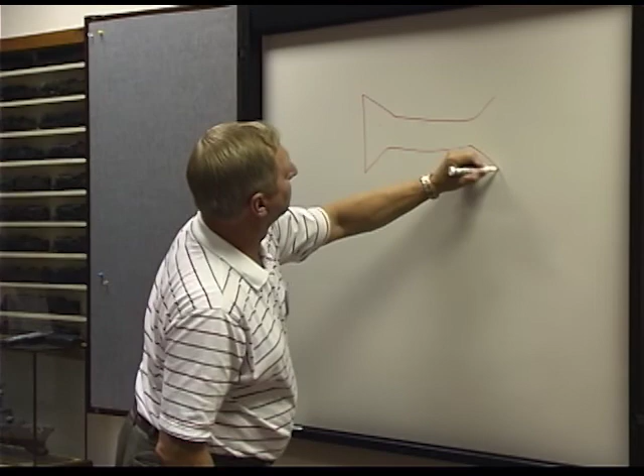What we did in 1992, for about $4 million, we installed slab shape rolling, which follows on Rod's comments about yield. When we were rolling a slab, on the last pass we would make that slab a bow tie shape. And I'm drawing in 3D, so that when we rolled it, this would end up with a little bit of a tongue on it. The natural tendency, if you didn't have this extra edge on it, was for it to be round. So the combination of these two shapes ended up with something almost perfect for using the maximum length on the plate. That was called slab shape rolling.

That uses a very high pressure hydraulic system, and there's probably 3 of those installed in the world, and one of those is at Conshohocken on the roughing mill. It improved our yield about 3% when we installed that in 1992. So that was one of the technical improvements that we had.

Thanks, Jim. Get this back down. Then, and I'm going up in history, and of course I'm going to be around a while, and there's a lot of people that know this story, so I don't have to, for the camera's sake, extend this too much longer.

1991, I'm in the 110-inch mill, up in the pulpit, where I always stayed, and I see down at the end of the run Bob Shaw. I said to the operator - Shaw at that point in time may have been president of the company, I'm not sure. Anybody know? Sure, '91, not quite yet. Shaw was not at Conshohocken, but he was up here in some capacity. He was down there, and I saw him at the end of the run with a tape measure. I said, who is that? Who's got a tape measure out on my run in the way? They said, oh, it's Bob Shaw, I think. And I said, yeah, it is Bob.

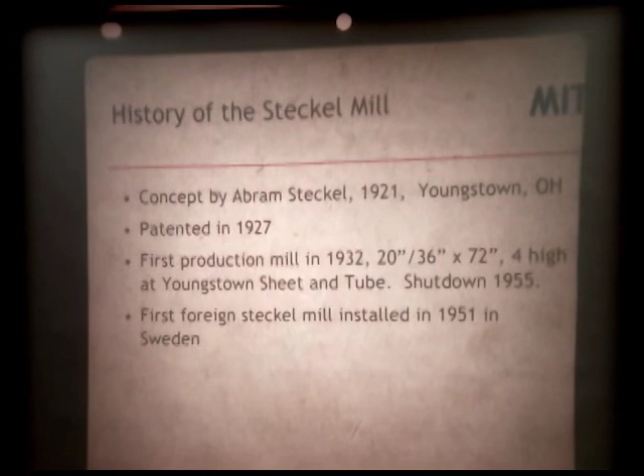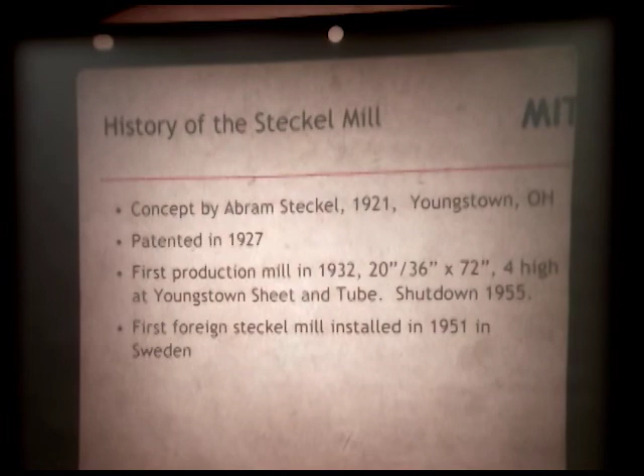It was a concept by Abram Steckel, an American from Youngstown, Ohio, patented in 1927. It was the first foreign Steckel mill installed, installed in 1951 in Sweden. But the Steckel mill built in Youngstown, Ohio, actually stayed in business and was shut down in 1955.

This is a picture of Mr. Steckel, and this shows a drawing of the side view of a Steckel mill.

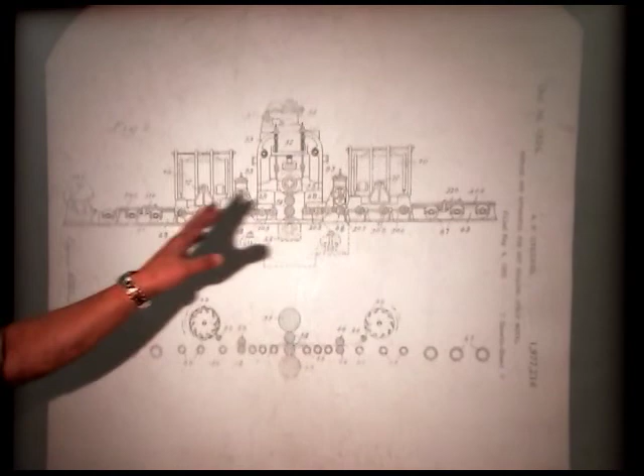It's a 4-high plate mill with heated coil boxes on both sides so you can put the piece up into the coil box and keep it hot. As Rod said, it gets cold as it gets longer.

Down at Conshohocken, in the old days we could only roll quarter-inch plate 600 or 700 inches long. Now we roll quarter-inch plate a quarter of a mile long. So the yield is extremely better.

In the old days the yield might be 70 or 80% on a piece of quarter-inch. Today it's 95% on a piece of quarter-inch.

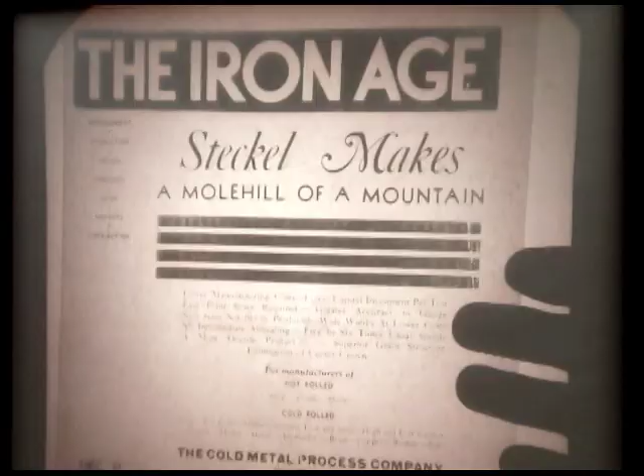This is Rod's favorite magazine, Iron Age. It talked about the Steckel mill, and this was December the 31st, 1931.

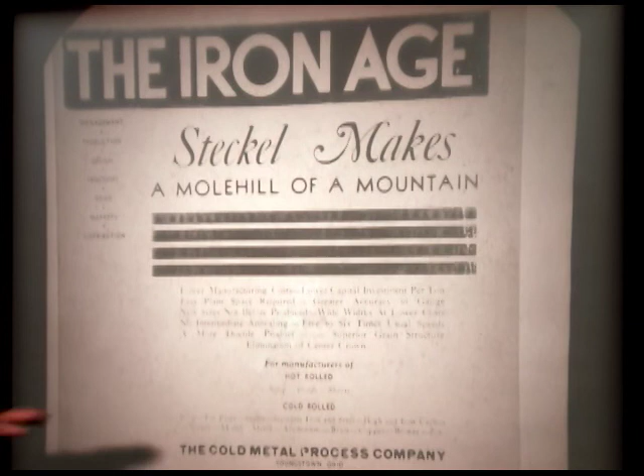This wonderful new thing that's going to lower your costs and improve your productivity and your yield, and best of all, it was designed to be a poor man's strip mill. But what it's really turned into, because it could never compete with the strip mill in quality, is a rich man's plate mill.

So all the plate mills being built now are having the Steckling capability attached to them if they're light gauge.

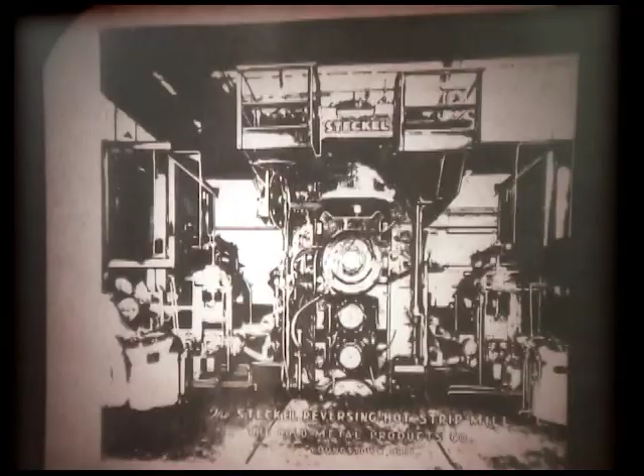This is a side view, and if you didn't know this was a 1930 picture, you'd swear it was Conshohocken. The difference between this and what I have is the computer controls on the mill at Conshohocken, which makes the difference between this, which was largely a failure of a mill.

It did not work properly. There's too much going on for a human being, or any bunch of human beings, to control. It actually took a computer and digital drives from the 70s and 80s to really get that monster of a mill to work properly.

So that you can roll a piece a quarter inch, a quarter of a mile long. It's a good concept, but you just couldn't execute it because you didn't have the technology to control it.

This is a modern Steckel mill, which is what I'm going to show you a picture of. It allows efficient production of wide, thin, low volume sizes where you couldn't before.

When you rolled quarter-inch plate on a 140-inch mill, quality suffered. From a yield perspective, you were a C minus. From a flatness perspective, you were a D minus. From a gauge control point, you were probably a C.

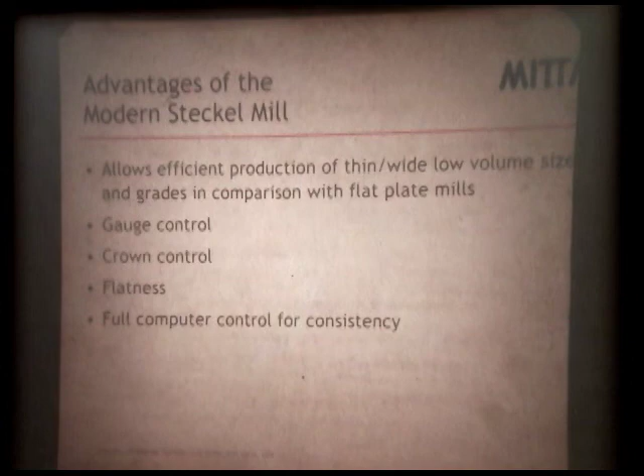With the Steckel mill, all of that becomes A to A minuses right along. So it really improved the rolling process. Before, the customers couldn't get thin plate, and now they can.

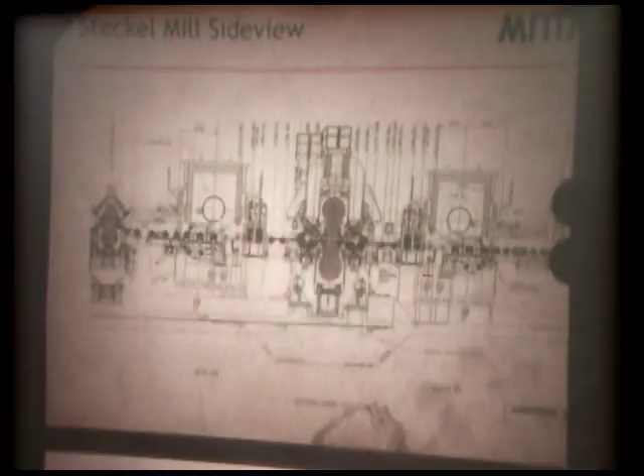This is a side view of the mill at Conshohocken, the 4-high plate mill with its coiling box. This looks just like what was in 1930.

I think the best thing I could do now is show you the film of the Steckel mill. The Steckel mill cost $150 million paid out of pocket, but it probably cost us another $100 million in problems. So, okay, thanks, good.

Let me show you this quick film. Here we go, Sam.

Mittal Steel USA is headquartered in Chicago, Illinois, and is the largest steel producer in North America. Our steel products include hot-rolled, cold-rolled, and coated sheets, tin mill products, wire, rod, bar, semi-finished shapes and rail products, and carbon and alloy plates.

We produce plate products at our mills in Burns Harbor, Indiana, and Coatesville and Conshohocken, Pennsylvania. Additional slabs and ingots are provided by Mittal facilities in Cleveland, Ohio, Indiana Harbor, Indiana, Steelton, Pennsylvania, and Sparrows Point, Maryland. Here's a look at our Eastern Pennsylvania plate facilities in Coatesville and Conshohocken.

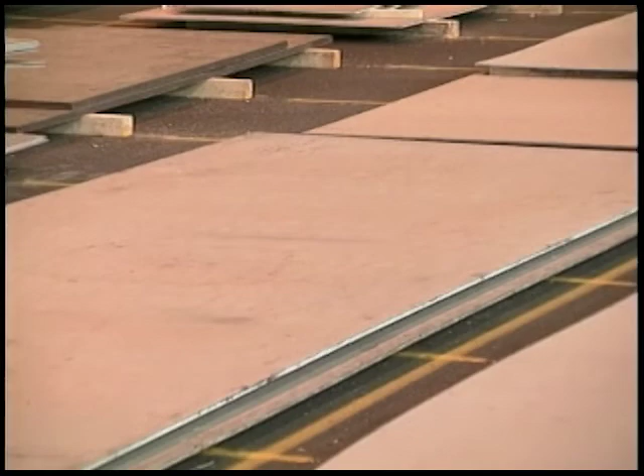Mittal's Coatesville and Conshohocken plate facilities have a specialty focus. Other companies offer many forms of steel, but we specialize in plate. We are the plate professionals.

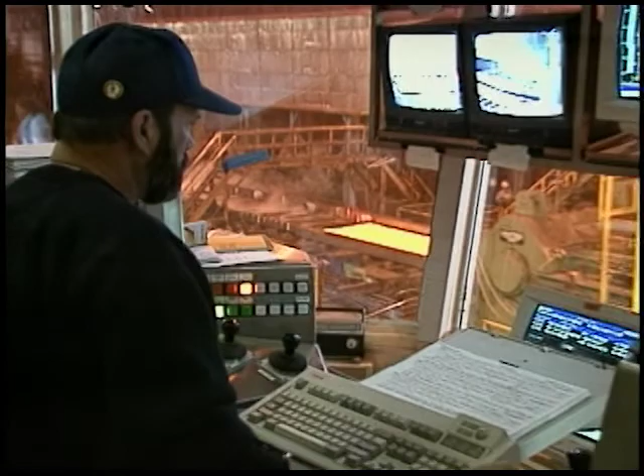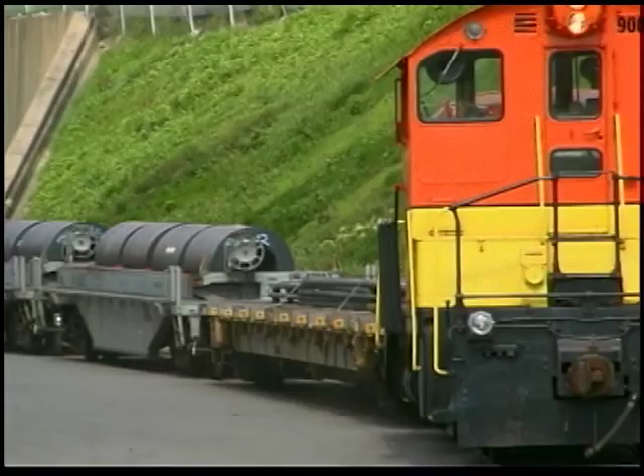We are customer-driven. Our people have only one goal: to satisfy the customer. That means producing the highest quality plate steel and shipping to the customer on time. To do this, we continue to invest in our company. We have dramatically improved our production facilities, including our electric melt shop, our rolling mills, and our heat treating complexes. Our plate facilities are world-class, and we aim to keep them that way.

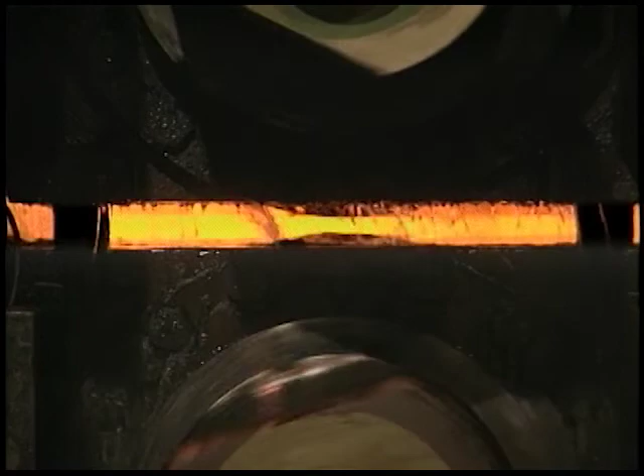Our modernized Coatesville electric melt shop allows us to improve internal quality. Automated rolling mills, including the Conshohocken Steckel mill, allow us to make plates to closer tolerances than ever before. And our heat treating facilities produce specialized steel to exact specifications.

We continually upgrade our environmental controls to protect air and water quality in and around our plants. Our technological growth gives us a strong competitive advantage, and our future plans are even more ambitious.

We've developed our plate-making capabilities over nearly 2 centuries. In 1825, we made plate for the nation's first iron-hulled ship, and today's Navy continues to rely on our plate for its submarines and aircraft carriers.

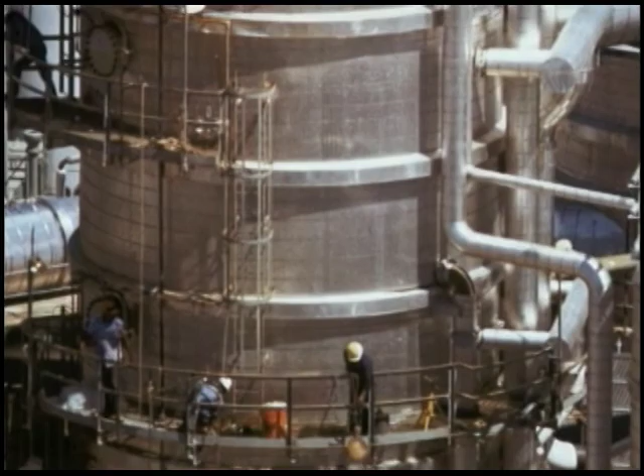Our products are being used to rebuild America's infrastructure, to build construction equipment and refinery and chemical process vessels, and for other applications that demand the highest quality plate steel. We're proud of our heritage, but we're not content. We strive to get better every day. That's the kind of company we are.

We make a wide range of high-quality carbon, alloy, and clad steel plate. Here's a look at some of those products and the technologies that make them possible.

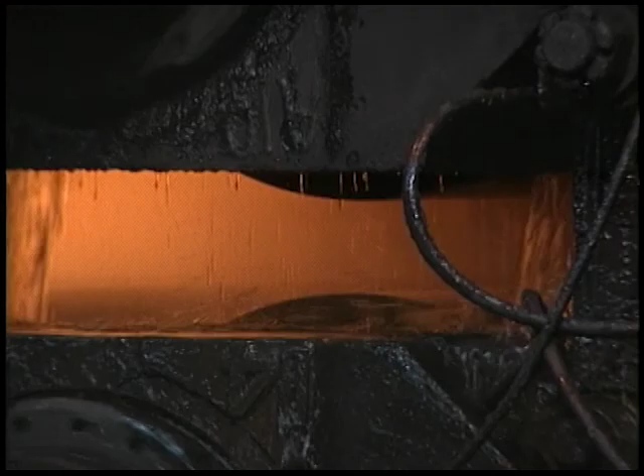Many of our thin plate products are rolled at our Conshohocken plant. Conshohocken's roughing mill reduces slab thickness from 9 inches to between 1 and 3 inches. The mill is fully automated and equipped with automatic gauge control. From the rougher, the steel enters the 110-inch wide Steckel mill.

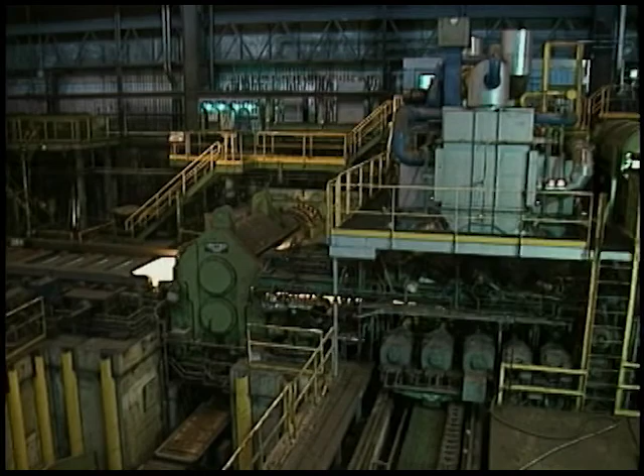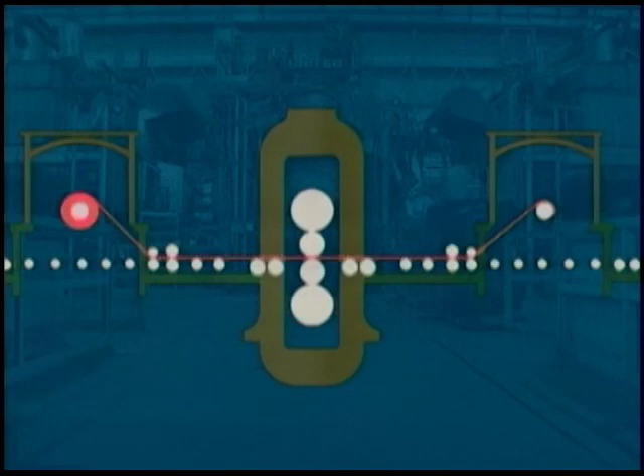This state-of-the-art mill can process carbon, alloy, and stainless steel as coil or discrete plate. The Steckel mill has coil furnaces on either side, which wind and unwind the hot strip of steel as it passes back and forth through the rolling mill. The system reduces radiant heat loss so the steel can be rolled longer and thinner.

Advanced computer systems control thickness, width, shape, and surface quality. Automatic work roll bending virtually eliminates plate crown, and automatic gauge control ensures precise dimensional accuracy.

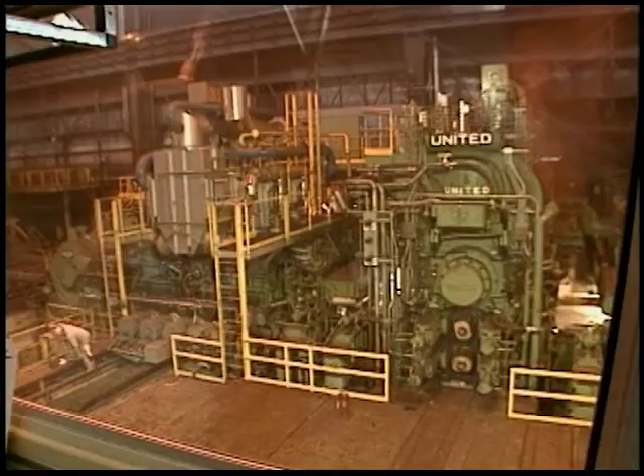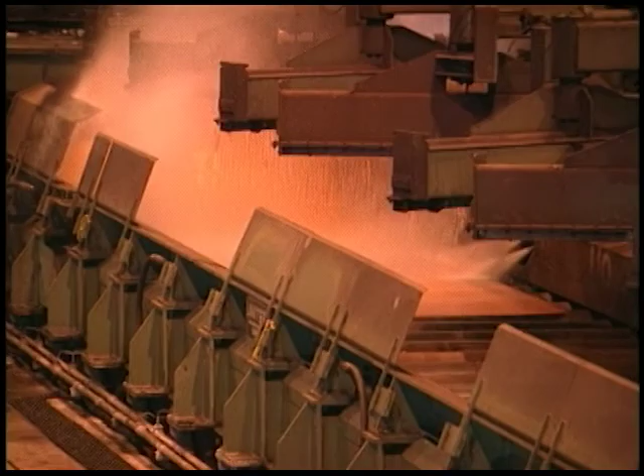The mill rolls steel coils to thicknesses between 0.118 and 0.625 inches, up to 102 inches wide, and as long as a quarter mile. Online controlled cooling allows yield strengths up to 80,000 pounds per square inch in certain product grades. After cooling, the steel is wound on a downcoiler capable of producing coils weighing as much as 40 tons.

Any questions about the film?

With that, that's what the education is. For somebody who's been through the 3-high mill, the 206-inch mill, and then you go down and spend time with Mike at Conshohocken. Have a nice lunch and a drink, but have a nice time in the mill. It's the education. It really is an enjoyable trip.

With that, I'll ask if there's any questions, I guess, from the group. Scott asks: I have a quick question. I guess crowning is a problem with the straighteners, but what is the tolerance? I mean, flatness, trying to get a true flat plate, but I'm sure there's some sort of tolerance on that. I'll give you the flatness.

The flatness of a plate is controlling, to some extent, the ratio of the thickness to the difference in edge gauge to center gauge. We call that crown. So if a plate is 1/4 of an inch thick on the edges, 0.25, and in the middle it's 0.253, that's 3/1000ths crown at 1/4 of an inch. You must maintain that 3/1000ths crown-to-thickness ratio all the way up through the pass schedule, or all the way down, if you will.